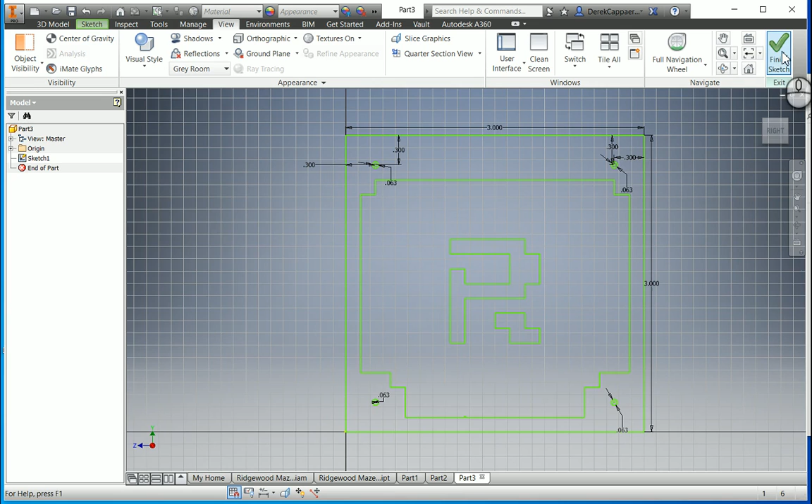I'm going to zoom back a little bit using my mouse, then extrude. Make sure profile is chosen, and then choose everything that comes out at me. I'm going to have to orbit using my center scroll wheel and the shift button. Notice this defaulted to 1 inch, which is way too much, 0.15. Enter.

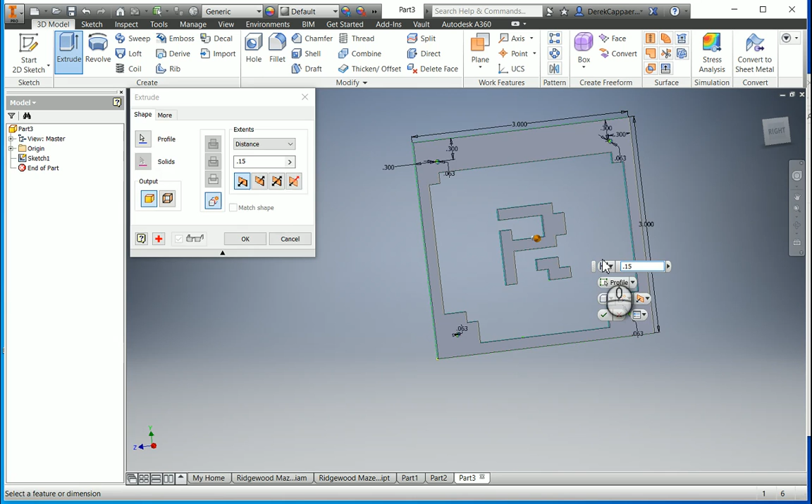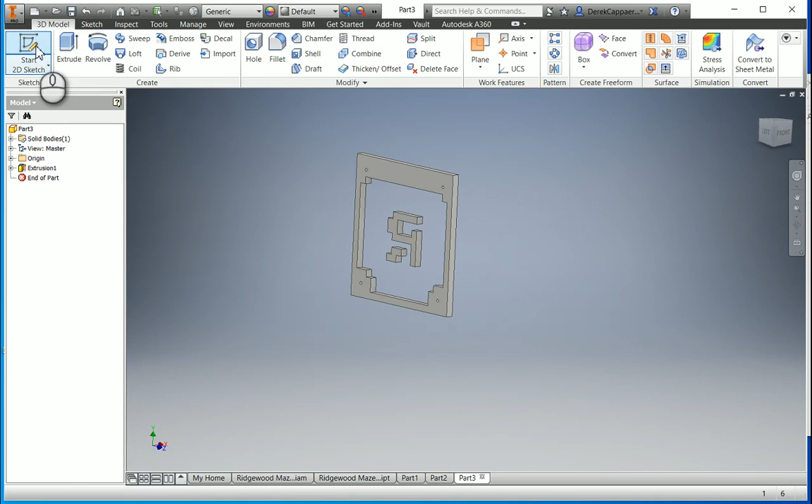Now, a couple other things that we need to do here. There is that sunken part, if you remember right, that goes into the white. It's down low so that the ball bearing will go through. So I'm going to orbit around this and do a new sketch. Make sure you do it on the back side. Not absolutely critical, but it's nice.

Now notice my grid isn't correct anymore. Anytime you do a new part, it changes, which when creating this video, I actually created a new part. You should still have the old part. I'm going to turn snap off. You probably won't need to do that.

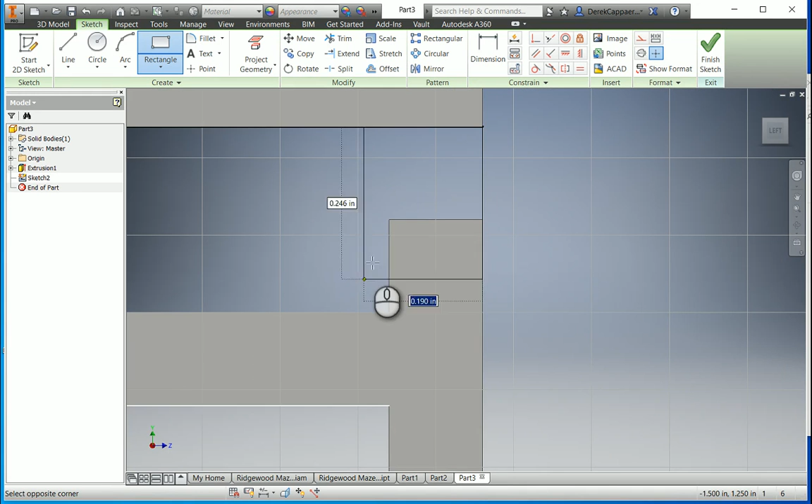Finish the sketch. Then what I'm going to do is extrude. And we don't want it to go all the way through the part. We want it the same depth that we did on the white part when we did that cut. Hit OK.

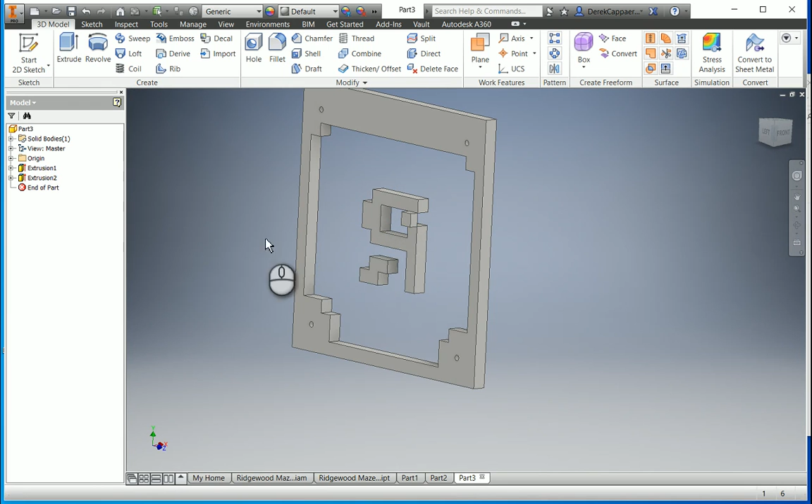Then what you want to do is the text on mine. So a new sketch on the top here. You're going to then use text tool. I've done this before, so I'll go a little faster.

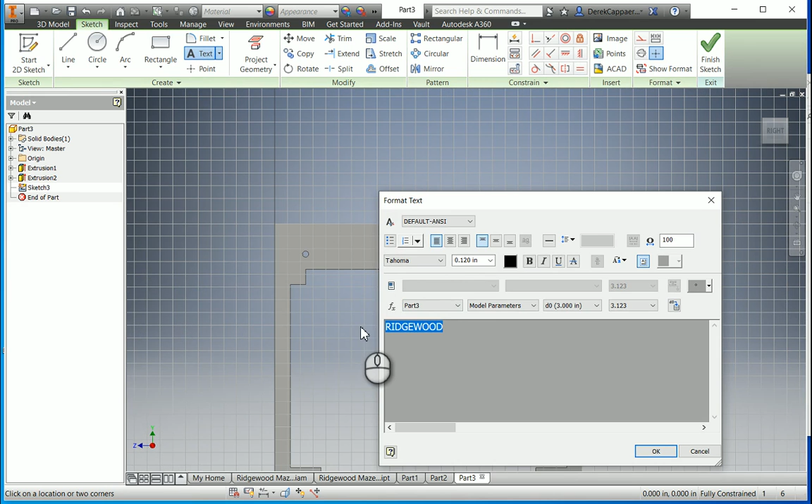Make sure you use the exact same text and the exact same size. That is critical. Got to be the same that you used on your other part. If it was bold, it should be bold.

Enter. Then what I'm going to do is hit the escape button so I can move this approximately the right spot. Dimension, just like you did on the other part. And this should be 0.54.

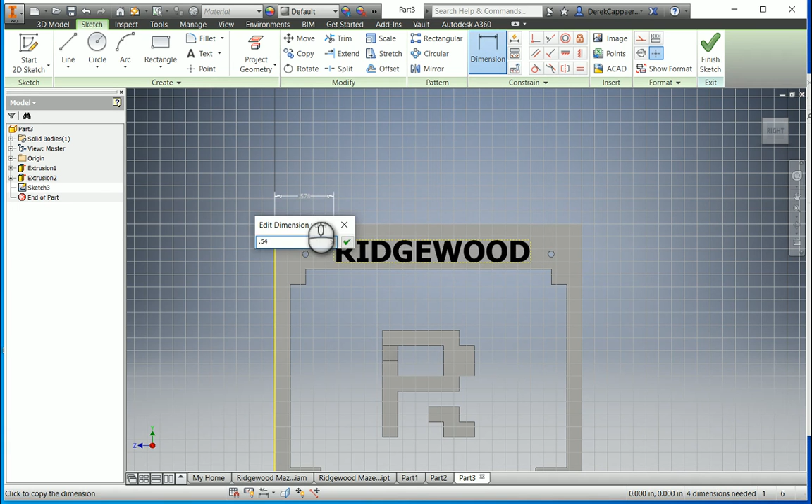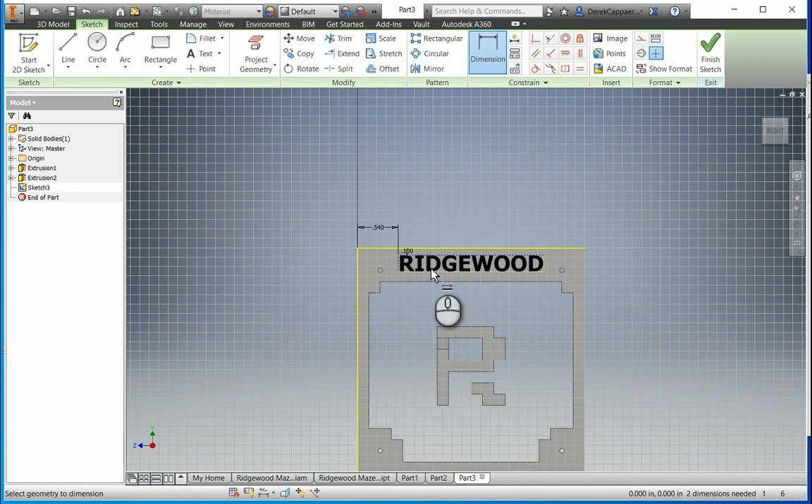And then it should be from the top. It should be, yikes, come on. Sometimes this thing will mess up. That happens. Hit delete. I want it from the top here to the top there. I don't know why it malfunctioned. 0.1. So it should be in the exact same spot as it was in that white piece.

Finish the sketch. I'm going to cut this through so that the white part can come through there. Choose my text, change it to cut, and we do want this to go all the way through here so that the white can come up and through the Ridgewood.

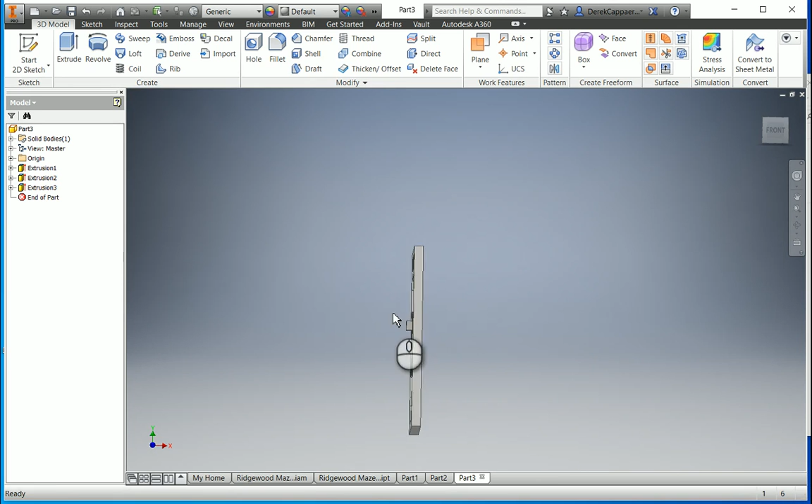The last step, which is kind of a weird one, this has to do with how the print software works. You want to do one last sketch. You need to put a little leg on here or somewhere else on your maze here.

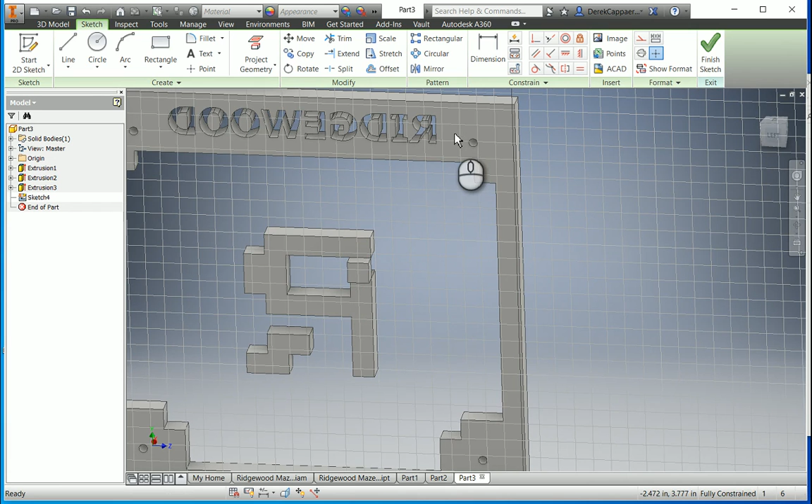In my case, I have this sunken part. If you don't have a sunken part, you want to do a sketch instead on the back side here, and you're going to extrude by 0.15. However, I do have this part that comes out.

So I'm going to do a tiny, you might even want to go smaller than that, really, really tiny leg that then you will extrude. And like I said, if you're going from the back, you have no depression like I do, you would do 0.15. Since I already have a depression of 0.1, all I need to do is 0.05.

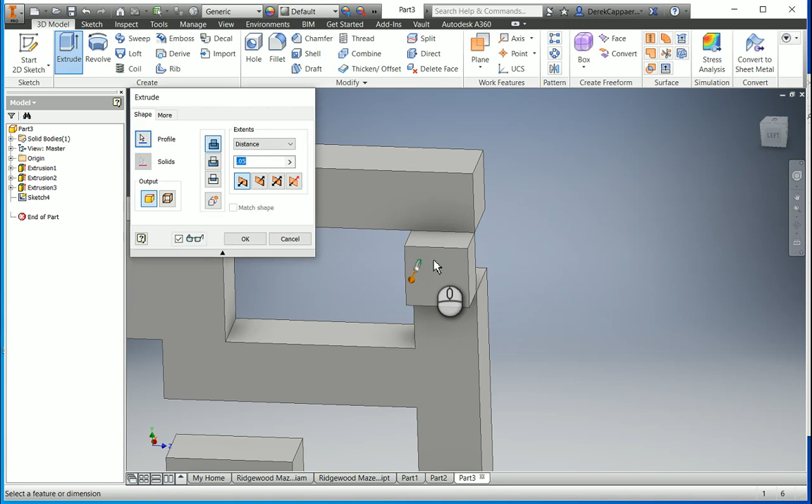And now what this does is in the print software, we're going to trick it, and this will sit right up over top of the underpiece.

Last step is to color this in. Highlight the whole thing, and then find the green or whatever color you want.